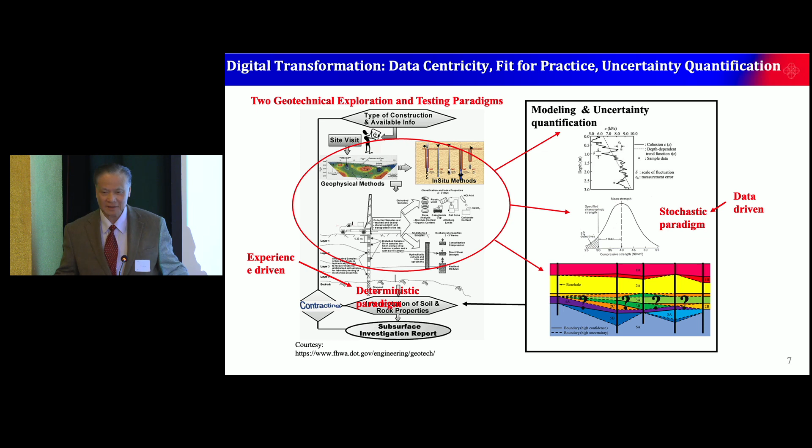At that time, he pointed out, this is my vision there. He said, traditionally, we interpret the site stratigraphic conditions more or less deterministically based on engineering judgment, based on the best understanding of the geological processes at the site. Can we migrate to the digital transformation in the sense that we can use machine learning, we can use stochastic simulations, and we can construct stratigraphic models, yet have quantified numbers to ascertain the comfort level or the uncertainty level that we have? So that's kind of the motivation to get involved with this.

And of course, Professor Mitchell talked about a lot of his concerns, and in a sense, it gave me the direction. If you want to do this, you need to think about those things.

So for example, uncertainty—certainly if we are doing data science and looking at the data, uncertainties need to be quantified through the root of the data, the authenticity of the data. And of course, Bayesian machine learning is really different from the frequentist interpretation. And then certainly the investigation data at a particular site is going to be always finite because we have to recognize and respect location-specific geological models. So we can't really readily transfer what you learn from one site to the other site, because the locality and uniqueness of the site is always there.

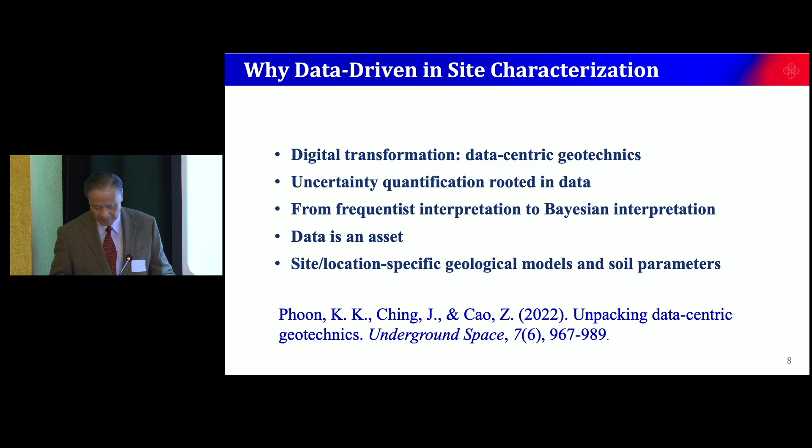So among some of the challenges that Professor Mitchell mentioned: for example, multivariate nature of the data, uncertainty and fidelity of the data, sparse and incompleteness and potentially corrupted, and 3D spatial variations. Those are the nature of the data I want to use to build my machine learning model. That's the first thing, the big picture that Professor Mitchell was able to articulate during our conversation. And certainly we all understand we have to recognize the specificity of the site condition—one site is unique, it's different from the other site.

And finally, of course, we want this to be like a pipeline for feeding into the subsequent reliability-based design, if that—we want to have some practical consequences.

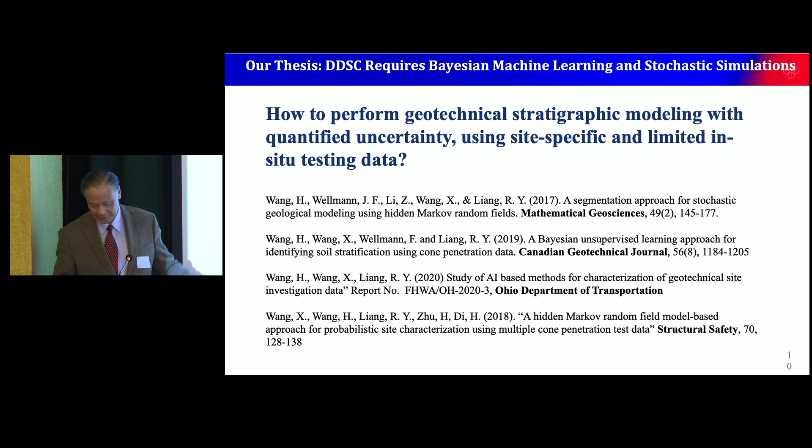So since we started working in 2017 or '16, and I reported to Jim in 2019, and then after that we published quite a few papers—this is just some of them. But if you want to see the details, you're welcome to look at those references. And we also published an article in Geostrata, the magazine, which had a special issue on site investigation.

And as you know, we have a standard called DIGGS, D-I-G-G-S. So naturally, I asked: when DIGGS meets AI, what would be the consequence? What would be the birth of that? So there was an article related to what we have done.

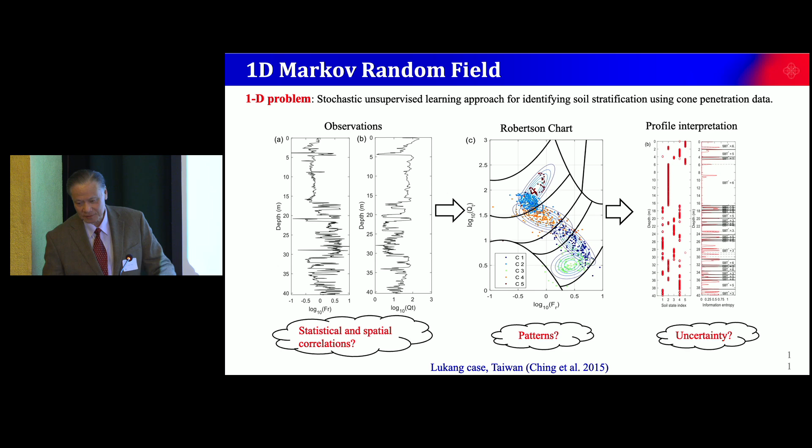Taking the CPT data as the example, what we're looking at is: can we do AI to discern the patterns, and also look at the spatial correlations as well as the statistical clustering patterns?

So our approach, very generally, is to utilize two spaces. One is called physical space—that's if we look at the 1D cone penetration data, we have the so-called soil type. In our stratification, we have to define whether it's clay, sand, or whatnot. That's what we call soil type.

It's a hidden layer. And then we have another layer, which is actually observed data—which is, if you look at it for the cone, the cone resistance and the friction ratio.

So what we do is, of course, using the Gaussian, we combine the data—map the data into the feature space, which is over there a traditional Robertson chart. You can do the clustering analysis, and the features of the soil types can be analyzed. The centroid of that cluster represents the mean of that similar soil type, and the shape is controlled by the covariance matrix.

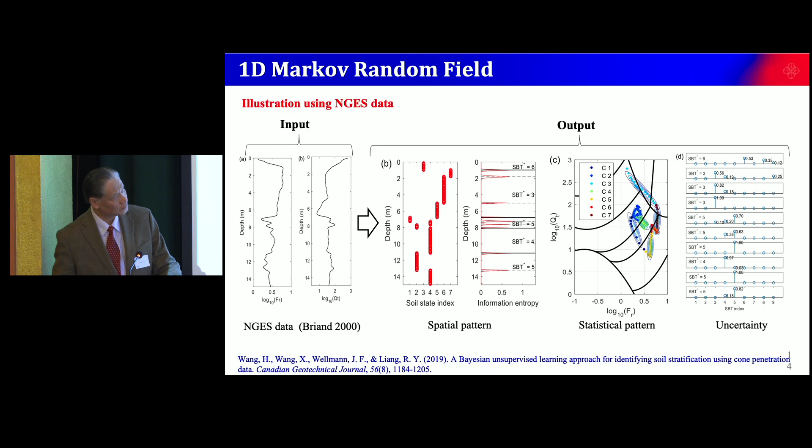So this is unsupervised machine learning. You don't really have to give them the prior training. They will just take the input data and be able to interpret it and provide you with the analysis result.

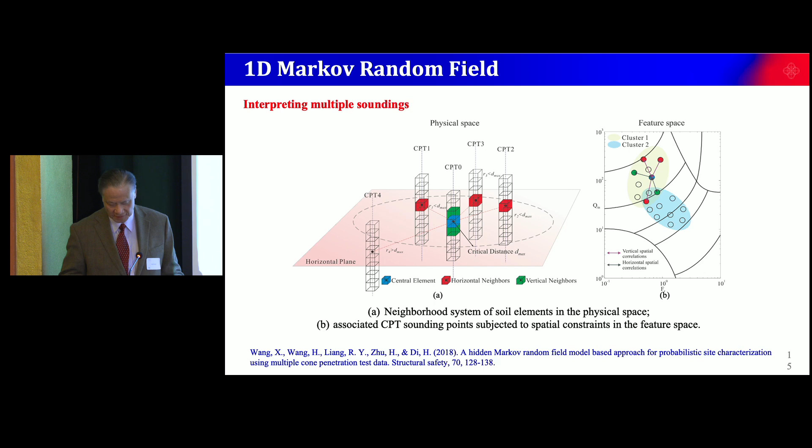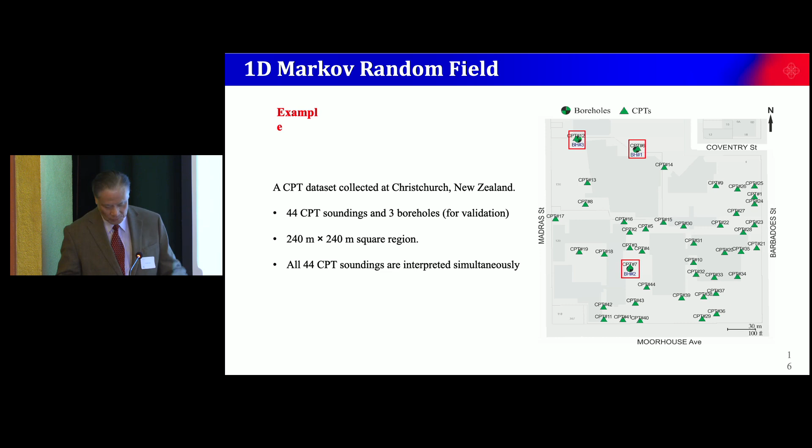This is just an example where we took the data from New Zealand, 44 CPT data, at a 240 meter by 240 meter region, and we were able to interpret all this data together.

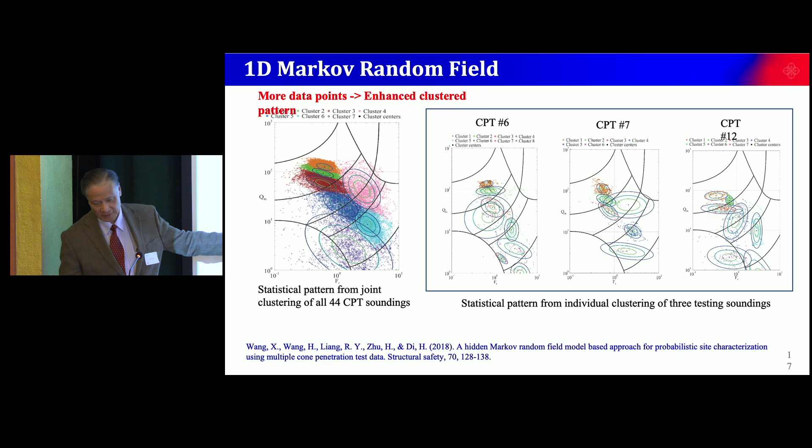So you can see the data that combined 44 versus just looking at one sounding data per se on the right-hand side. Basically, you can observe with more data that can fuse together to interpret for each sounding, you get more consistent result.

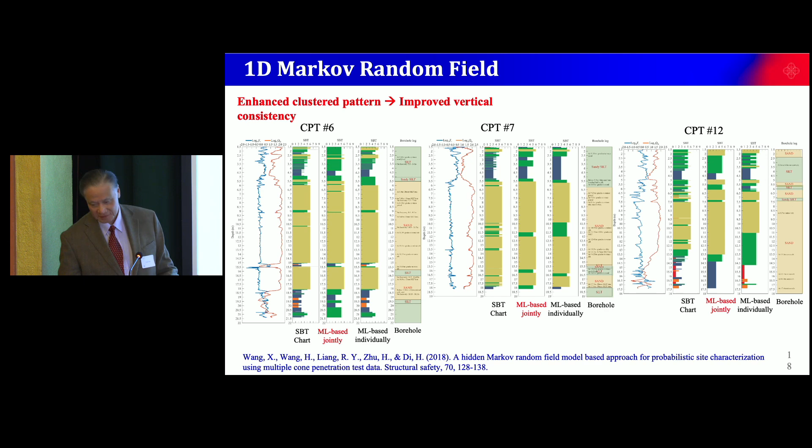So you can see that with these combined interpretations, you get more consistency in your interpretation in the vertical direction as well as in the horizontal directions. That's, again, the unsupervised machine learning that together with the stochastic simulations, we were able to do that.

Of course, the algorithms were published as a public domain on GitHub, and there are plenty of users worldwide now already getting into the program and trying that for their interpretation of the site conditions.

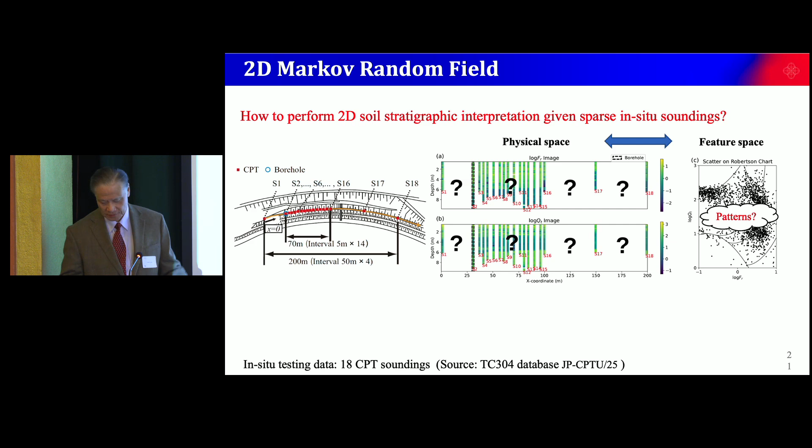And of course, we expanded into the two-dimensional case. The principle is the same, so I'm not going to dwell into the theories. And then, basically, you ended up with...

Again, the interpretation, another example: you have multiple soil boring log data, and using the same algorithms for 2D situations, you will be able to create a stratigraphic information. Underneath, that's the mapping of the uncertainty using the information entropies.

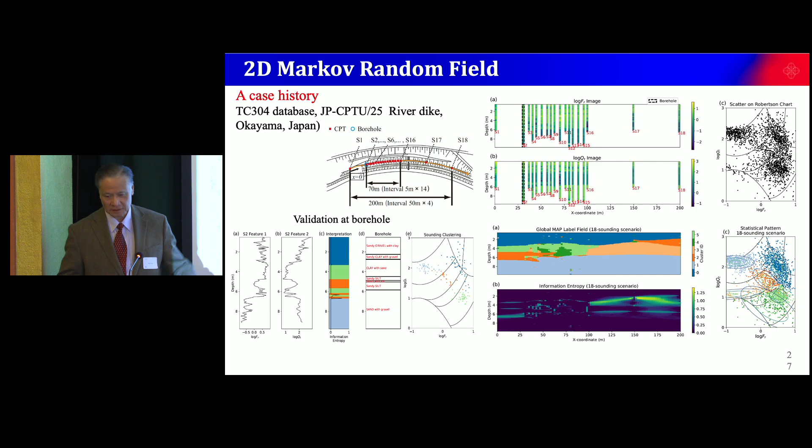That will help the engineer to see where they should put additional boreholes to improve the certainty of the interpretation, or that uncertainty can be propagated into your reliability-based design. Again, the same was published on GitHub.

To summarize, I guess, with detailed discussion with Professor Mitchell in 2019, we had a very good vision in terms of what the other challenges are, what was the ultimate outcome that we need to achieve for the profession to adopt it. But I think this is currently what we have: using the AI technology together with stochastic simulations to be able to interpret CPT data for creating the stratigraphic models with the uncertainty quantifier.

So at the end, I'm saying, I guess a lot of my fellow graduate students will feel the same. We thank Professor Mitchell for his guidance, inspiration, and mentorship throughout my early career as a graduate student and into my entire career. We will miss him deeply, and certainly will cherish all the memories that we share with him. So with that, thank you very much for your attention.

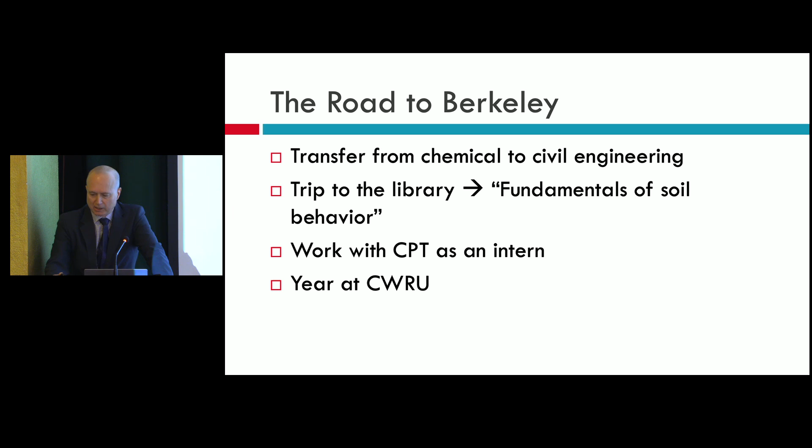Sometime after I came, Jim and Mike Jamiolkowski decided to collaborate on research. Mike had been supervising, or really doing with his team, a lot of calibration chamber testing in Italy. They had literally hundreds of tests by that time already, and I think the interest was how to make sense of all that data. That's basically how I ended up doing a thesis on cone penetration resistance analysis.

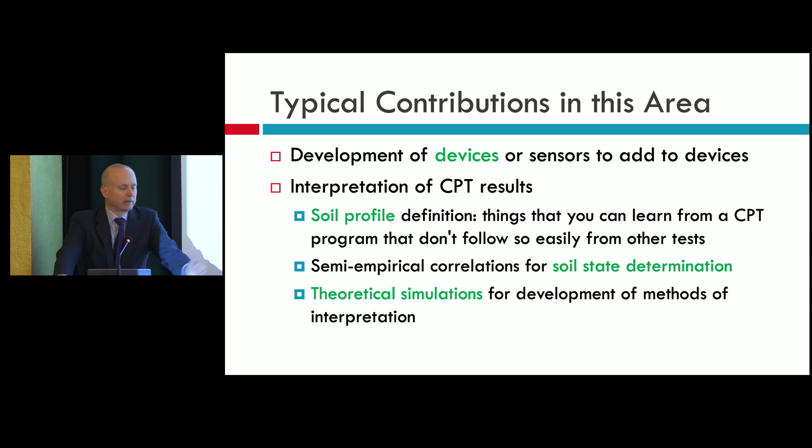Now on to his contributions to CPT research. We can think of his contributions, or anyone's contributions, as falling into three boxes. One would be the development of devices — putting sensors in a cone penetrometer, for example, or coming up with a new device. Then, exploring things about a soil profile that you really can only do with the CPT. And finally, interpretation of the CPT, which is kind of what I worked on with him. I want to go over each of those and give a few examples. This is by no means an exhaustive list of papers.

In terms of device development, there were two devices that I think he was very interested in developing. One was the acoustic cone penetrometer, and the other was a lateral stress measurement cone penetrometer.

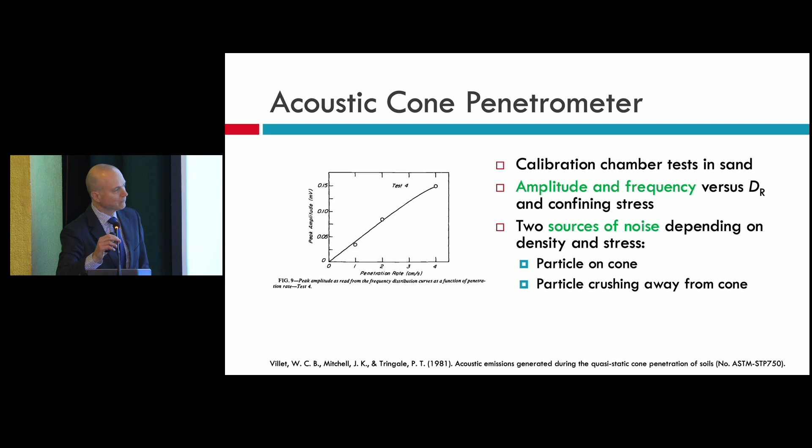And then there was the lateral stress cone, about which I don't have a slide. Then a lot of his papers have the CPT in them, in this role that I would say is: what can I do with the CPT? What do I really need to use the CPT for, that would be hard to do with other methods of investigation? So,

of course, it would be hard to do an SPT on the moon, but you can come up with a portable cone penetrometer. So he was the PI in this so-called soil mechanics experiment of NASA. And you got little soil profiles from those CPTs, right? Cone resistance versus depth for shallow depths at low confining stress because of the lower gravity.

And we reanalyzed that for a conference. To make the story short, it's pretty dense stuff, because you could get measurable cone resistance even though the effective stress was pretty low.

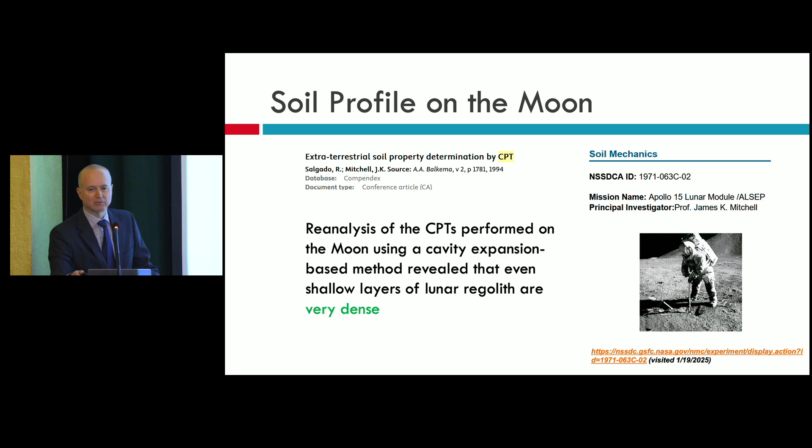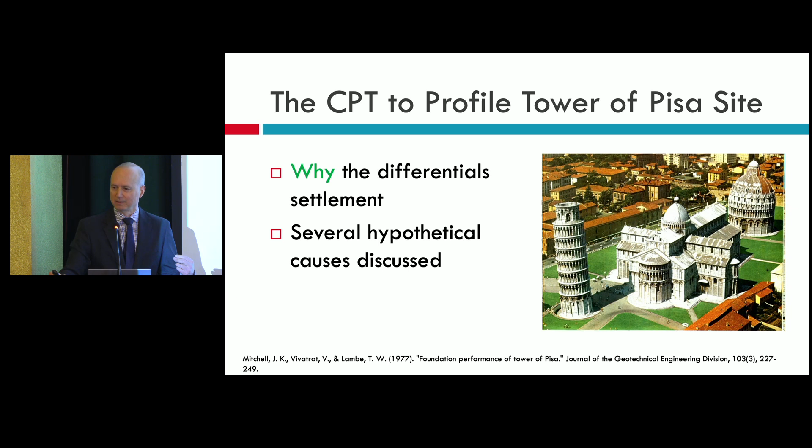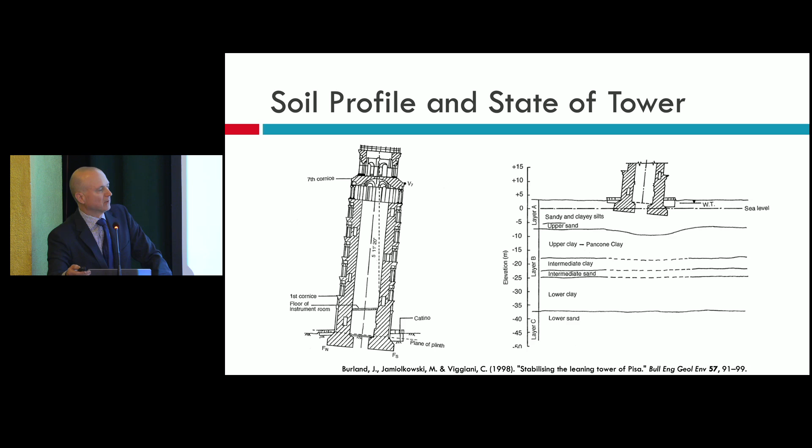So he went into some of these hypotheses. And the idea then is that it's not sufficient to come up with a general model for your soil profile, but you really want that detail. So Mike Jamiolkowski and the Tower of Pisa Commission did do a lot of high-quality CPT testing, and you can clearly see that of the hypotheses entertained, a pretty significant difference in soil strength and stiffness existed between the two sides, right? The side from which the tower leaned and the side towards which it leaned.

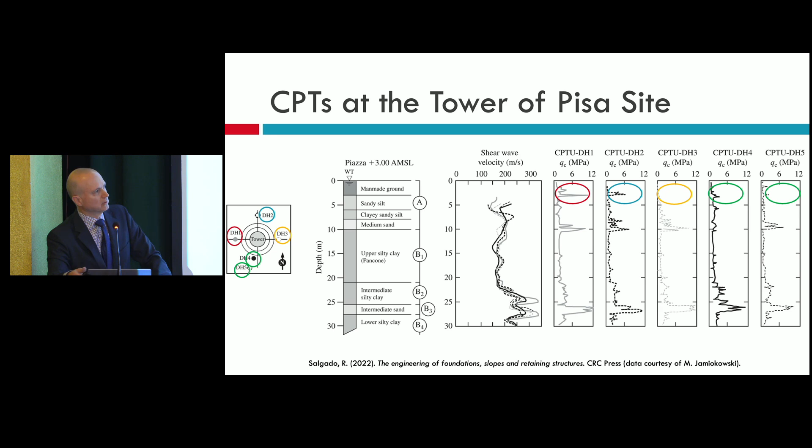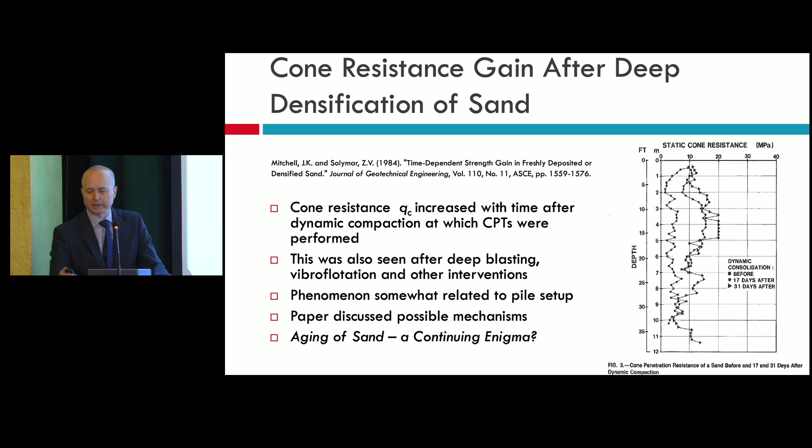By the way, I agree with Chris that this is still kind of a slightly open question. Maybe Catherine and Kenichi will tell us what the real answer is. But Jim's lecture on aging of sand, a continuing enigma, shows that this continued to be in his mind to the end, because we tried to reproduce some pile setup processes in the lab, for example, and we were not successful. And it's very expensive to do because you have to wait a long time. Yeah, it's still something to study, I think.

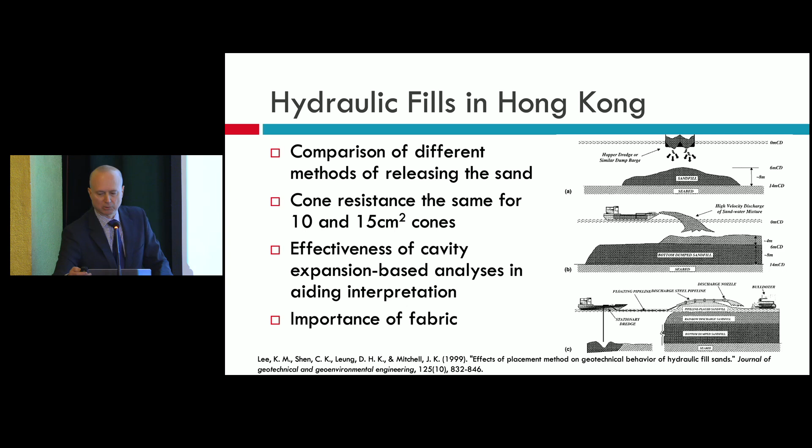All right, last example of use of the CPT. In this paper, Jim and co-authors looked at what happened if you did hydraulic fill by 3 different methods: bottom dropping or dropping from the surface using 2 different methods. And it made a difference. And if you read the paper, it really becomes about soil fabric, right? These different processes lead to a soil with a different fabric, therefore different mechanical response.

Now on to interpretation of CPT measurements. As I mentioned before, that's what I worked in. And if you want to reduce it to its essence, you are trying to get certain quantities, I'll call them desired quantities, from measured quantities. What these desired quantities depend on is what you're going to be doing, right? If you are working with some model, you're looking for the parameters in that model.

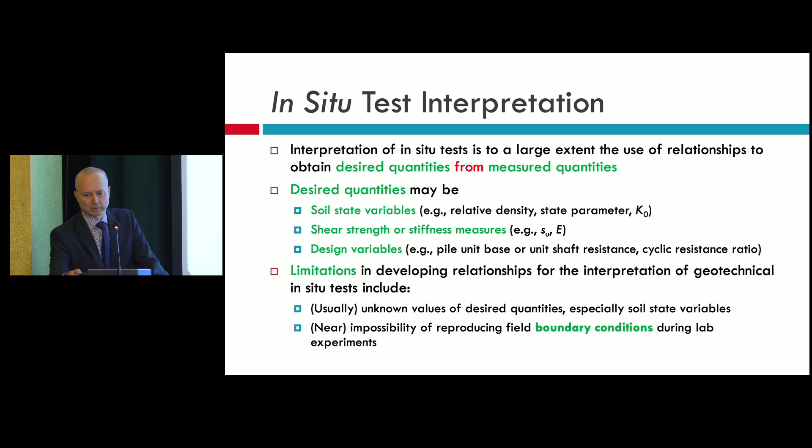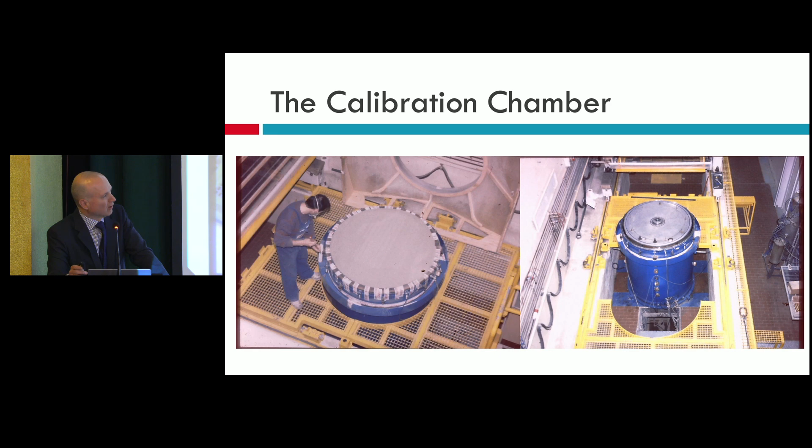The idea is very simple. You prepare a large sample at some desired density, you subject it to a known stress state, and you push a cone at the center. Then you end up with a lot of data, cone resistance versus soil state, and you want to make sense of that.

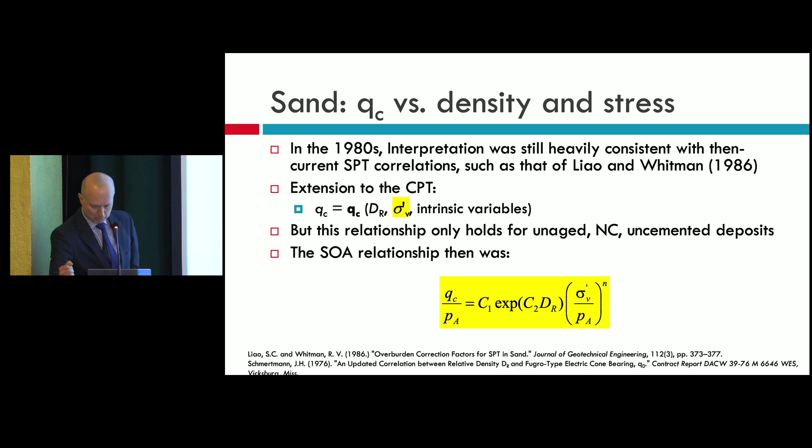At the time, in the 1970s and 1980s, the thinking was very much influenced by Liao and Whitman, which had a correlation that was basically in terms of vertical effective stress. So standard penetration resistance was a function of vertical effective stress. The initial correlations that were proposed for cone resistance versus soil state were also in terms of vertical effective stress. But there was the realization that maybe over-consolidation and the resulting lateral effective stress would actually have some role to play. But there was no clarity about it.

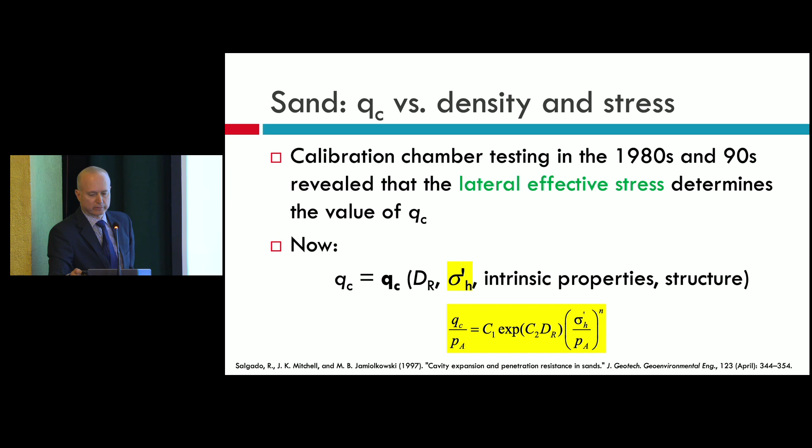So that's one of the things that we did. If you actually go back and plot, you don't even need to do theoretical work for it. If you plot cone resistance versus vertical effective stress, mean effective stress, and lateral effective stress, you see a straight line for lateral effective stress, you see some correlation for mean effective stress, and you see no correlation for vertical effective stress. So that work in Italy, also backed up by some work by Guy Houlsby and colleagues at Oxford at the time, I think pretty much clarified this point. So cone resistance is a function of lateral effective stress.

I might make a comment as to how, in this case, the prevailing model or thinking at the time, think of Durgunoglu and Mitchell, where you're looking for a bearing capacity failure mechanism. The way we used to think about cone penetration was like a shallow bearing capacity problem, shallow penetration, when you're pushing your foundation in and you need to raise the column of soil next to it. And deep penetration is different. You are actually forcing the thing in by pushing soil laterally aside, right? So that was kind of what went on with that work. We started viewing things in that manner. So now a correlation would have lateral effective stress in it and not vertical effective stress.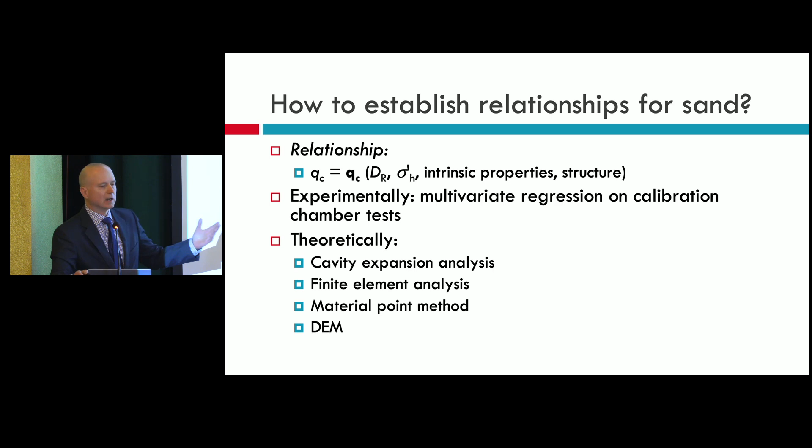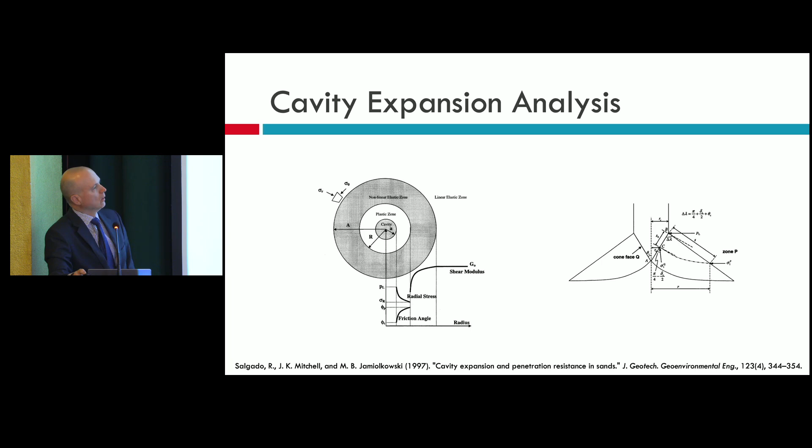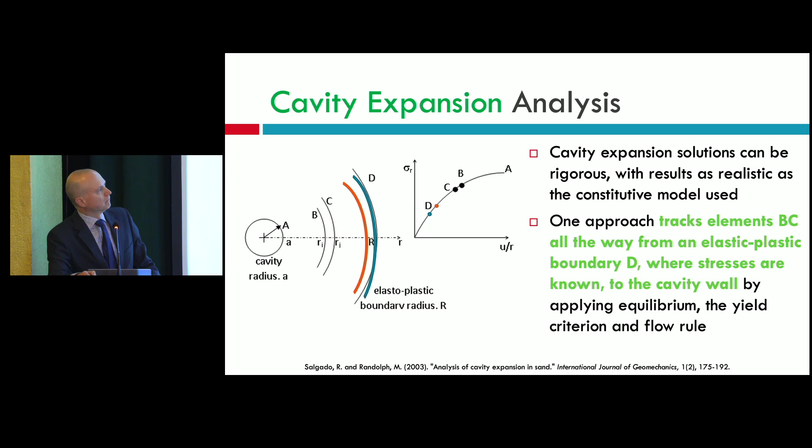So you can analyze the cone penetration process in many ways. I suppose nowadays I would say the material point method is the most effective way. At that time, we used cavity expansion analysis. And the idea is that your cone, when you're pushing it in, is creating and expanding a cavity, right? And so the pressure necessary to expand the cavity must be correlated to the vertical force that you're using to push it in. So we published this work. I got to still work some more on it for a few more years. I perfected the cavity expansion analysis with Mark Randolph a few years later, and the actual penetration resistance analysis in the work with Monica a few years later.

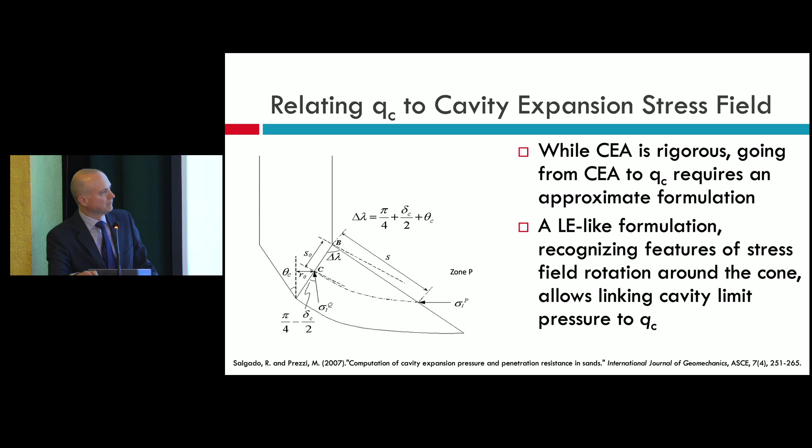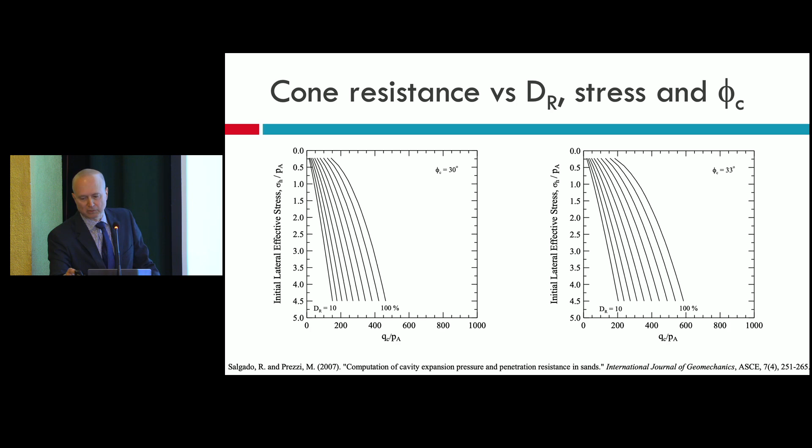The nice thing about having the theoretical capabilities is that now you can calculate cone resistance for any combination of values of your input parameters. And if you want to visualize what's going on, you can generate charts like this. They are easy to use in interpretation if you just want a quick check on things.

The last paper I'm going to talk about is this work we did with Ross Boulanger. Ross, when I was finishing, was already at UC Davis, and I think he's in the room. So if I'm saying something wrong, you can correct me. I think he was interested in compaction grouting at the time, and basically compaction grouting is in a way a cavity expansion process. So he wanted a copy of my thesis. In those days, I think I actually had to print it out to share it. So this shows how much time has passed.

And later on, instead of compaction grouting, we ended up applying it to liquefaction resistance assessment. So we knew how lateral effective stress affected cone resistance. We knew how it affected the cyclic resistance ratio, so we could come up with CPT-based liquefaction potential curves and see what effect K0 would have in shifting these curves around.